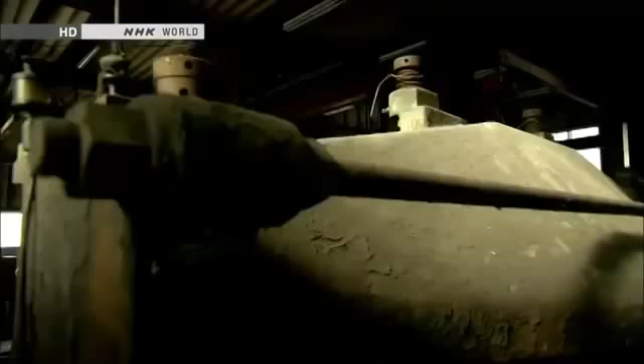In a workshop near Mount Fuji, a curious being has appeared. It's 3.8 meters tall and weighs 4 tons. It is a giant humanoid robot named Kuratas.

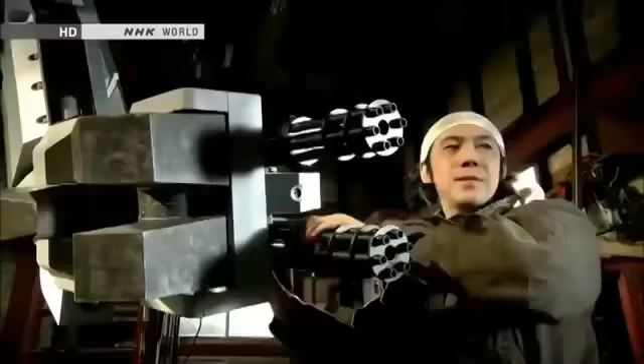Kuratas is a contemporary artist's creation. He holed up here for 2 years, building the robot with input from an expert.

He calls Kuratas a work of art, but it's a sophisticated piece of machinery. A person seated inside can control the robot, move its limbs, and grab things.

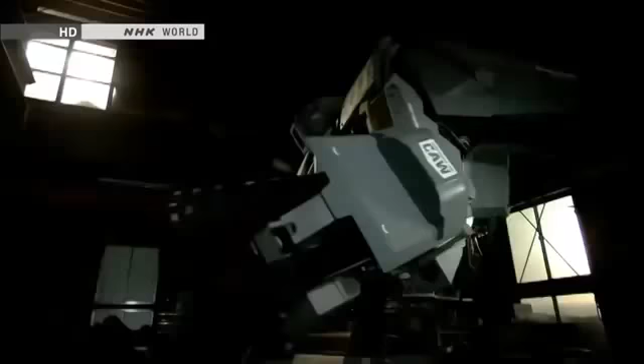The artist says he was inspired by robots in science fiction tales and animation. That vision sustained him as he worked in solitude.

Things that were once unthinkable are becoming real. How will robots evolve? Well, military applications could be one option. They'll probably become more and more like humans. They could surpass us in strength and ability.

People long dreamed of creating these extreme machines. Now, humanoid robots are here.

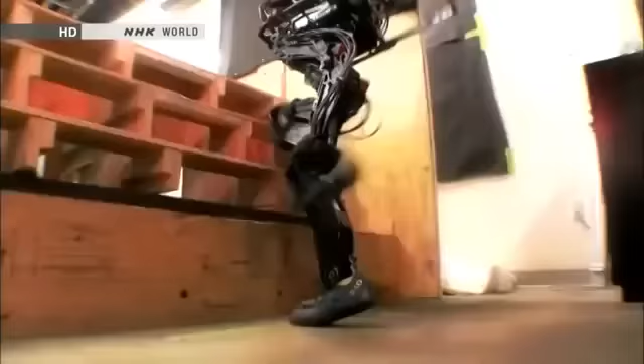They think like we do, move like we do, and even sacrifice themselves for us. We want our robot to change society, because robots must be useful.

Electronics and computing, progress in vision systems, there's many pieces of it. We will see much more capability continue to grow.

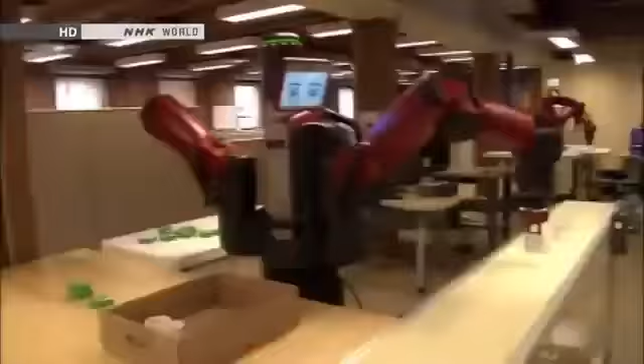Since the Industrial Revolution, people have entrusted some jobs to machines. But there may come a day when humanoid robots do much more complex jobs. Then, what will people do?

And you'll see more and more robots doing things in society, whether it's manufacturing or service applications or home healthcare applications. The key will be to skillfully divide labor between humans and humanoid robots.

The disaster that hit Japan in March 2011 accelerated efforts to develop robots with human traits. The Fukushima nuclear accident left people powerless.

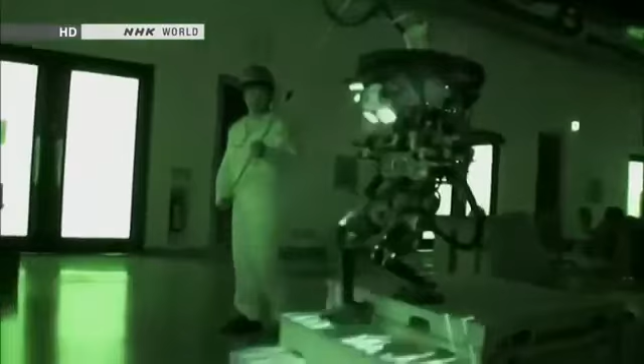Robots can take over when things become dangerous. They can plow through rubble, climb ladders, even make repairs. People are turning to humanoid robots to handle all of these tasks.

We're eager to launch it soon to end the crisis. By joining forces, we can make a truly useful contribution.

Only a humanoid could do it. Or the day will come when robots will really assist mankind. The nuclear disaster in Japan sparked explosive advances in humanoids at the front line of robotics development.

This program explores the future that's fast approaching.

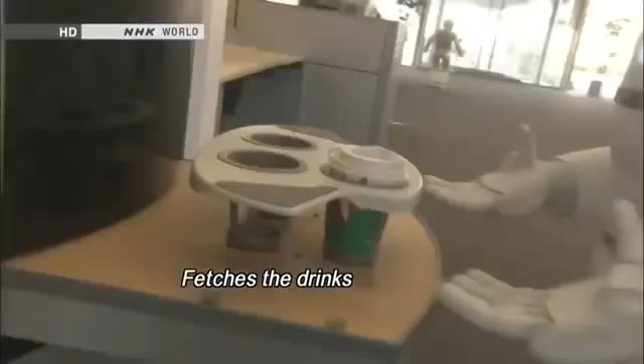Asimo was created by Honda's research and development subsidiary.

We were allowed to film their top-secret robotics laboratory.

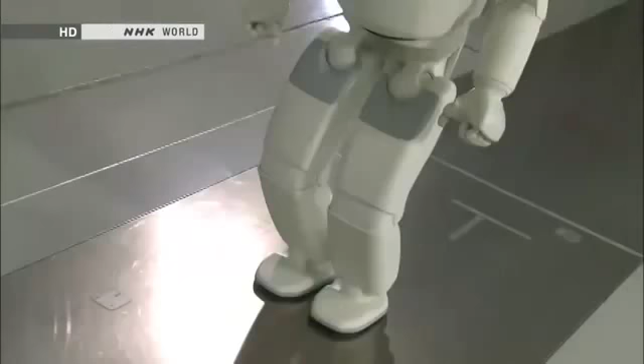Japan is a worldwide leader in the development of humanoid robots. Asimo is the country's crowning achievement. Engineers continue to make improvements.

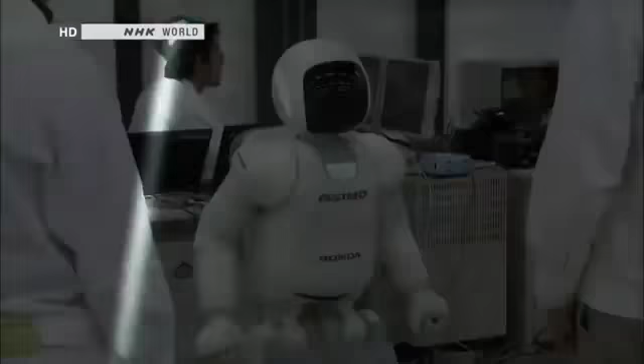Asimo's most innovative feature is its advanced intelligence. The robot can think and act on its own without human intervention. That's made possible by sensors that replicate our 5 senses.

Asimo's head contains 8 microphones. It uses them to listen and engage in conversation.

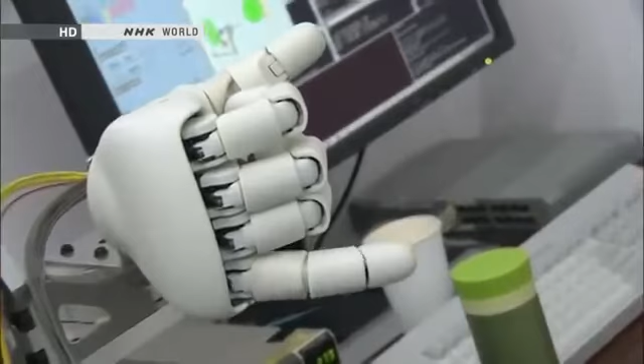Asimo also has a sophisticated sense of touch. Its fingers can make subtle movements, like a person's.

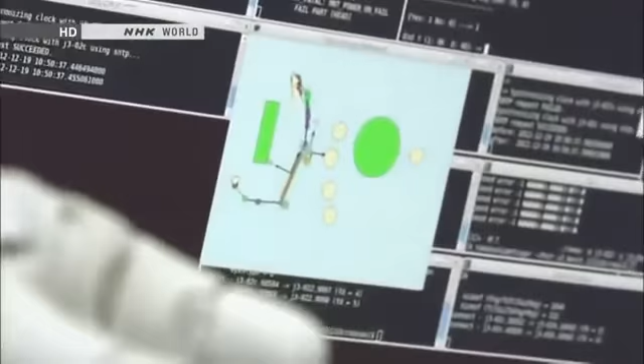Sensors are embedded in the fingertips, too. They can gauge the hardness of an object, like human fingers do.

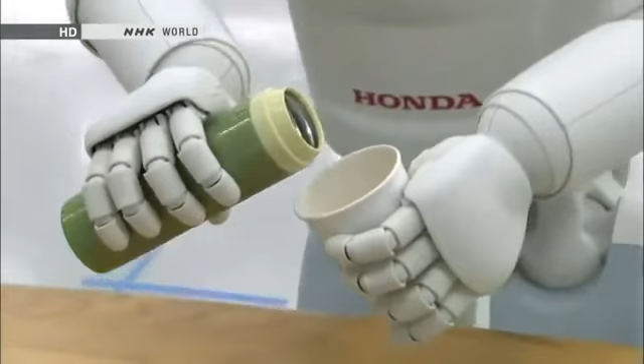Most robots use a fixed amount of strength to grab things. But Asimo exerts more power to open a tightly sealed water bottle and less when holding a paper cup. Its artificial intelligence uses information from the fingertip sensors to adjust the grip.

The developer's ultimate goal is for Asimo to be a valuable partner that coexists with humans.

The engineers who created Asimo all grew up watching animated shows about robots, such as Astro Boy, Doraemon, and Gundam. They dreamed of someday making their own.

Satoshi Shigemi is the development team's leader. He has been designing robots for the past 16 years.

From the beginning, we wanted to design a robot that could help people. To realize that dream, we're constantly asking ourselves, what kind of robot would be able to change society, make people happy, and make life easier for people around the world?

Our idea is to create a robot that will change how people live. We're working through the technological issues, one by one, in order to reach that goal.

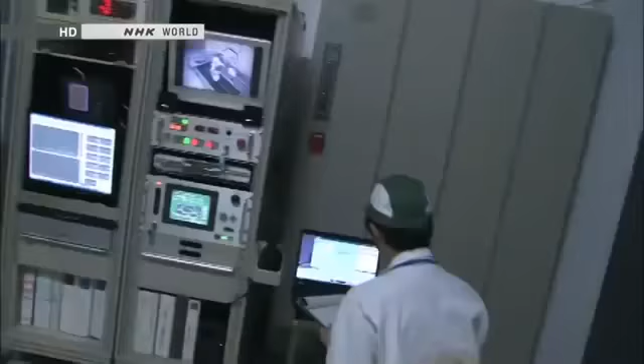Asimo's advanced physical capabilities are revolutionary. The robot can walk and run. It can reach speeds of up to 9 kilometers an hour.

For robots, walking is much easier than running. When running, both feet momentarily leave the ground. Balancing in mid-air is no easy task.

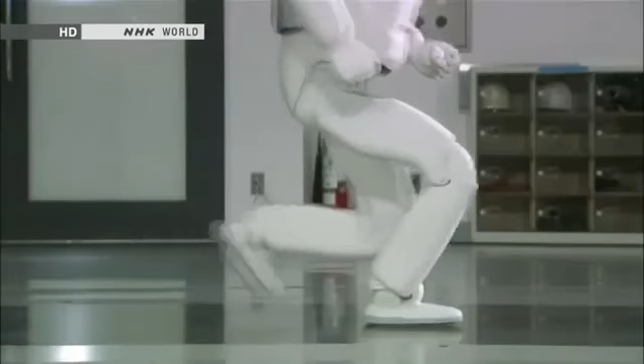Maintaining posture while jumping or floating in the air was a major technological breakthrough. Asimo leans its upper body slightly forward to maintain overall balance, going forward straight in the air. Sensors in Asimo's waist measure the robot's angle, and it leans slightly to compensate, forward or back, side to side. That's how it stays perfectly balanced in the air.

Asimo has been evolving ever since development began in 1986, much like a growing child. But something happened that made researchers realize Asimo's real-world limitations.

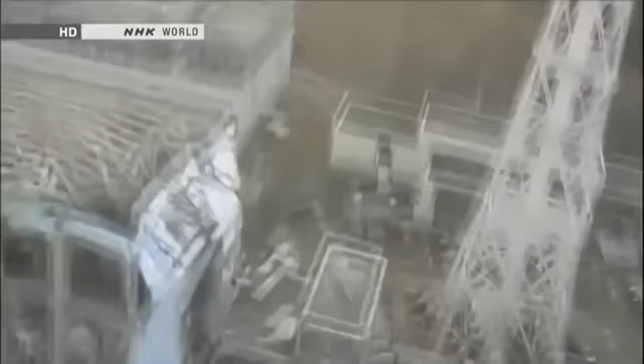It was the accident at Tokyo Electric Power Company's Fukushima Daiichi nuclear plant. The damaged reactors released radioactive substances, making it difficult for humans to deal with the crisis. People needed something that could confront the dangers and bring the plant under control. Robots.

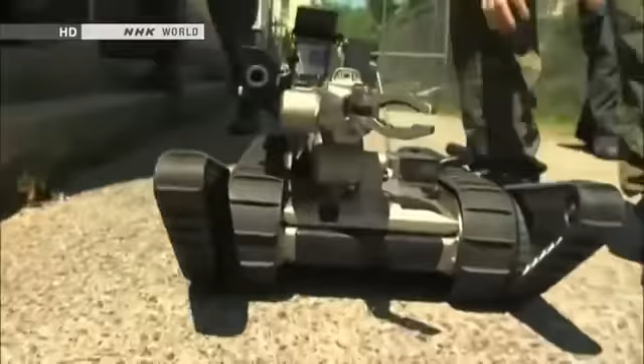Japanese officials sent a request for robots developed by the U.S. military. The robots were sent to Fukushima in April 2011. They recorded images inside the damaged reactors.

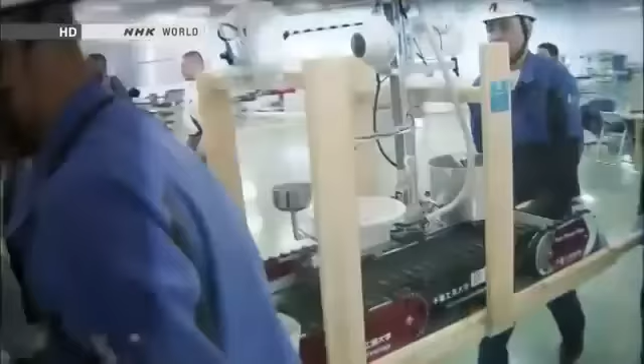Since then, a variety of Japanese robots have been enlisted as well. Robots have proven to be useful, but 2 years after the accident, they're only used for inspections. They're not able to do all the work of humans.

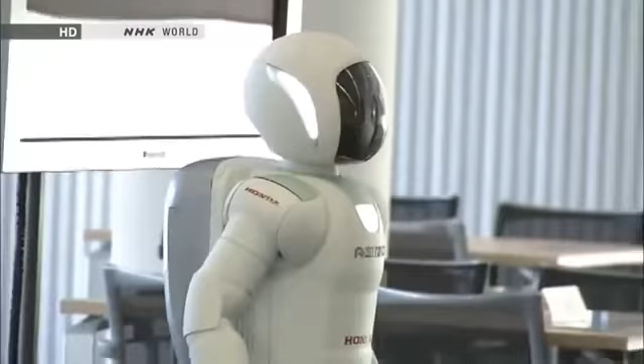What about Asimo? Right after the disaster, people flooded Honda with phone calls and emails asking the company to send Asimo to the Fukushima plant. But Asimo wasn't up to the task.

It could move nimbly over an office floor and other flat surfaces, but large vertical gaps and obstacles were a different story.

We heard from many customers. We ourselves regretted that Asimo couldn't be of help. It was obvious that the Asimo we had built wasn't ready for real-life action. We realized right away that we needed to make something different, something new that could offer immediate assistance.

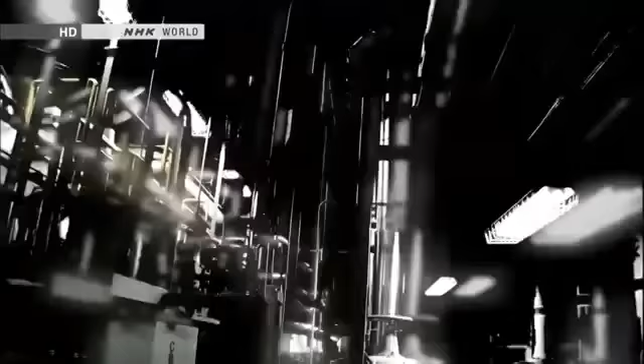Honda wasted no time. Company officials offered to create a robot free of charge to assist TEPCO in the recovery. TEPCO accepted. Officials asked for a robot that could open or close valves inside the nuclear plant.

We wanted to flush out radioactive materials that remained inside the pipes and bring down radiation levels in the facility. That was our first goal. Unless we opened or closed the valves, the area would remain highly radioactive, and that would prevent workers from entering the facility and impact the entire decommissioning schedule.

How many valves are there? Each unit has from several thousand to tens of thousands of them.

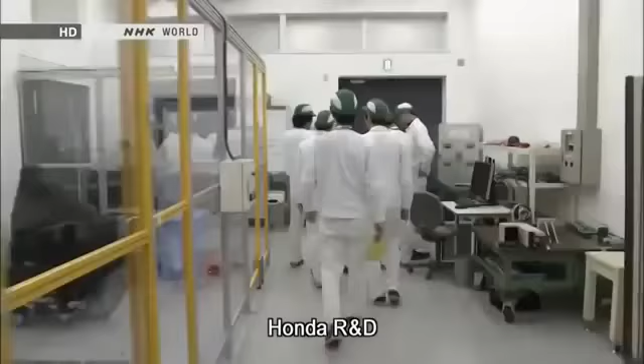In July 2011, 4 months after the accident, Honda began designing a robot for use at the nuclear plant. Members of the Asimo team were put in charge of the project. A humanoid robot would take too long to build, so engineers focused on making a robot specifically for operating valves.

Asimo was crucial to their efforts. Its ankles employ advanced balancing technology. Developers reasoned that using it would allow the new robot to work inside rubble-filled reactor buildings.

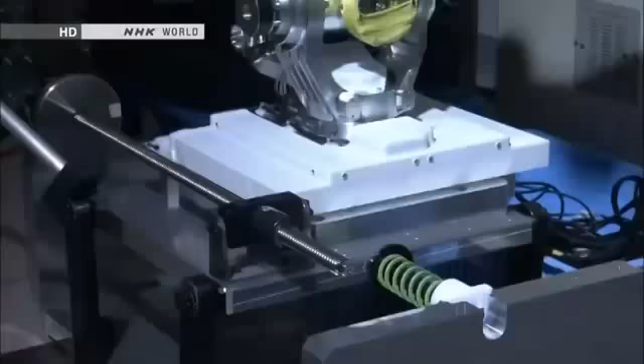The team worked exceptionally fast, completing a prototype in just 4 months. They turned Asimo's leg into an arm for operating the valves. Even when the base moves, the arm remains steady.

So far, so good. Officials from TEPCO evaluated the prototype at the National Institute of Advanced Industrial Science and Technology. The government-backed group for cutting-edge research contributed to the development effort.

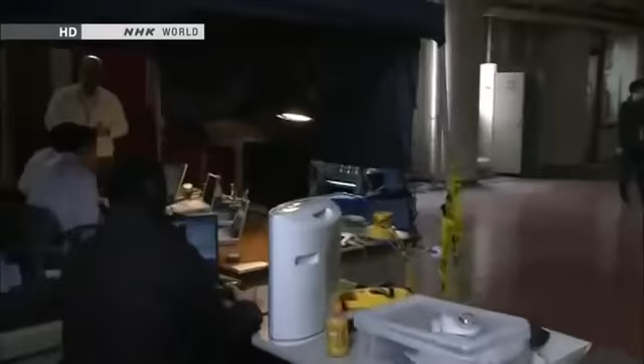A TEPCO official couldn't take his eyes off the robot's movements. We may be quite demanding, that's okay. We might be quite direct. The test is designed to replicate conditions inside the nuclear plant.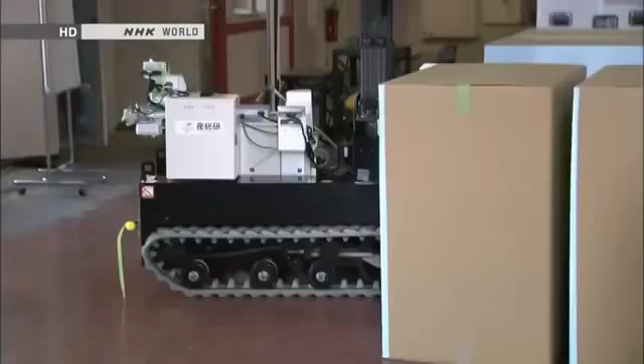The robotic arm is remote controlled. Testers send the arm toward one of the valves. There are a number of unknowns, including the condition of the valves. They may have rusted since the accident. A valve might break if the robot applies too much force, or it might not budge at all.

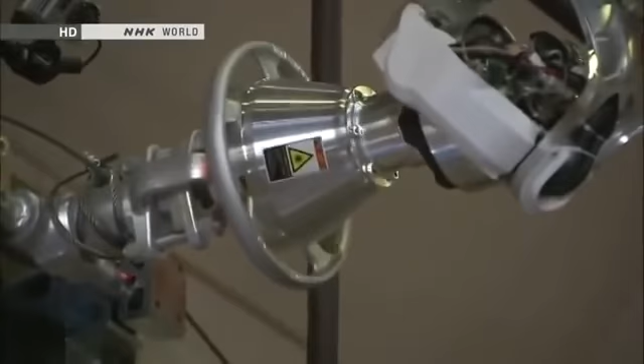The robot uses just the right amount of force and turns the valve on the first try. It's passed the test. This robot can do more than inspections. It could help in the recovery effort.

From what we've seen, the robot seems near perfect. We want to use it as soon as the need arises. It's important that we quickly do what we can to make that possible.

The Fukushima accident also encouraged U.S. developers to design emergency response robots. Department of Defense officials have spearheaded the effort. Before, they had shown little interest in humanoid robots. Now, they view them as vital for disaster response. The architect of the new strategy is Gil Pratt of DARPA. He oversees funding for leading-edge research at the Department of Defense.

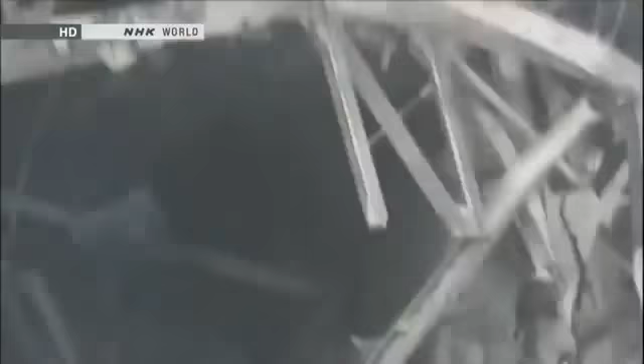There are many aspects of disaster response in Fukushima that inspire people in robotics to work on new capabilities. If they were able to take action during those first 24 hours, then the first reactor maybe would not have blown up in an environment that is too dangerous for a person to do. And what's important to us is that the robot is compatible with human environments, compatible with human tools.

And also compatible with human operators without special training. As a result of that, the easiest form that comes to mind is the human form. DARPA is backing the development of a humanoid robot for catastrophes, such as nuclear power plant accidents.

This company is leading the development work. It has already built several military robots. Okay, I'll show you the current status of the robot.

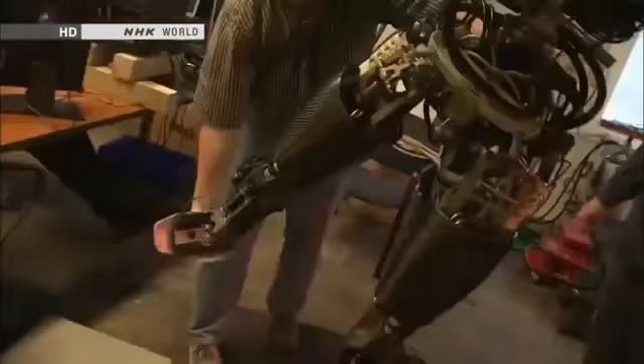This is the first American-made humanoid robot for disaster response. It's called Atlas. Before, U.S. designers had focused on robots with specialized functions.

Why the sudden interest in humanoid robots? Traveling over debris, prying open valves, using tools for repairs. Performing multiple tasks like these is impossible for specialized robots. Crises also require robots that can navigate doors and stairs. Humanoid robots are ideally suited for such situations.

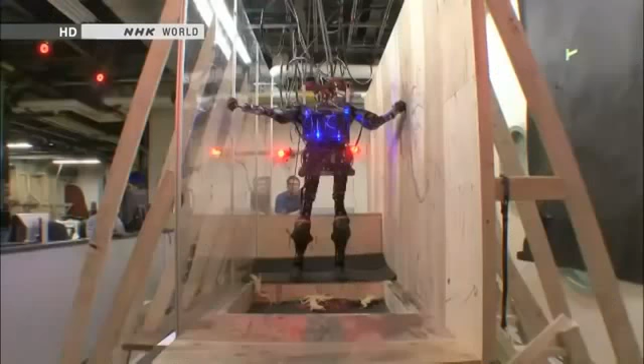Tests of this prototype were going smoothly. It can easily climb stairs and jump from a height of nearly 1 meter. It can negotiate obstacles using its arms and legs. It can already handle more demanding environments than Asimo can.

Atlas is loaded with technologies originally designed for military robots. A quadruped robot called Cheetah can race through a battlefield at 50 kilometers an hour. LS-3 is for transport. It can carry heavy supplies for soldiers.

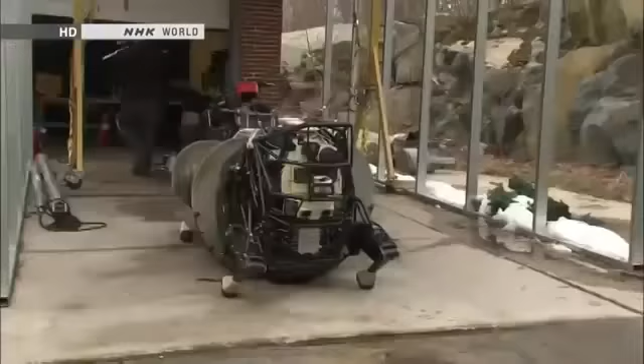The ferocious-looking robot gets its strength from a powerful hydraulic drive system. A hydraulic device can be small, yet quite strong. The black cables convey hydraulic power to the legs. That generates the brute force required for harsh conditions on the battlefield.

A web of hydraulic cables covers Atlas's body. They form a muscular suit of armor for clearing debris.

Another important technology comes from military robot engineering. This machine's joints have a wide range of motion. They allow for flexibility that humans can't achieve. Atlas's joints are capable of moving in 28 different ways. Atlas can crawl through narrow spaces and withstand sudden shocks.

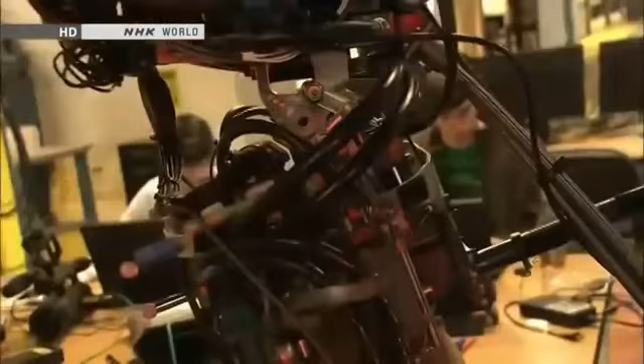Then we have the knee. This has 3 in the hip, just like us. This way, and then this way. I am very impressed with the number of degrees of freedom. It will be able to do these human-compatible tasks without a lot of the limitations that other robots have.

Engineers will combine Atlas's rugged body with sophisticated artificial intelligence that's almost near completion. They aim to complete the robot by December of next year.

One reason you see humanoid robots is because there are some people working who are really interested in robots as an entertainment thing or as a performance thing. I think that's different. We're much more interested in basic capabilities for emergency response, rescue. So I don't think Asimo has been designed to do those things yet.

U.S. engineers stepped up their efforts to develop humanoid robots after the nuclear accident in Japan. Japanese researchers are embracing the same mission. In November 2012, robot engineers from around the world gathered in Osaka for an international conference on humanoids.

Gill Pratt from DARPA was one of the participants. He came to invite engineers to join a project sponsored by the U.S. Defense Department. Okay, March 11th.

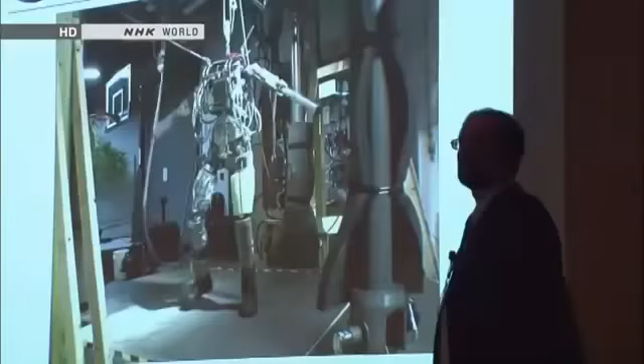They have 2 degrees of freedom, not 1. The Robotics Challenge is a competition to develop emergency response robots for major disasters like Japan's.

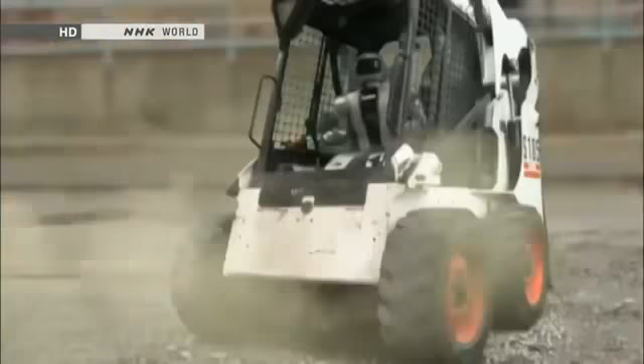The challenge consists of 8 tasks. Driving a vehicle to approach a disaster site. Walking over rubble. Removing obstacles. Opening doors. Using tools to break down walls. Climbing ladders. Turning valves. And making repairs.

A single robot must complete all 8 tasks. The development period is 2 years. DARPA will provide contestants with funding of up to $4 million.

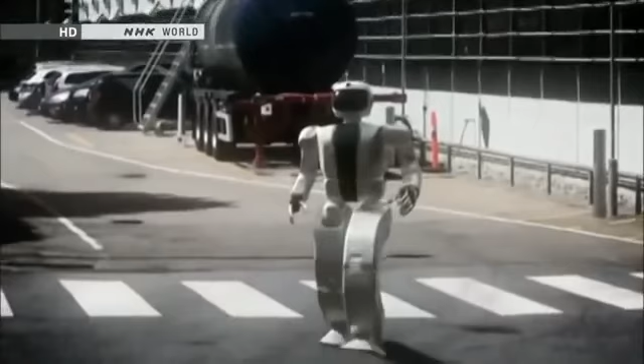DARPA has received over 100 proposals from research groups worldwide. They include renowned organizations like NASA and MIT.

Japan is at the forefront of humanoid robotics engineering, yet its researchers hesitated to throw their hats into the ring.

So actually, to me, it's difficult not to see that some of the results of the DRC are going to be used to advance, as you say, advanced military technology. The DRC is about developing robots that I believe wholeheartedly are completely impractical for military purposes, for offensive military purposes.

Will the technology that we come up with find its way into military systems? Probably yes. But I guarantee you that if you work on a robot for healthcare, there's a chance that that technology will also find its way into military systems.

The members of one Japanese research institution wanted to take part in the competition.

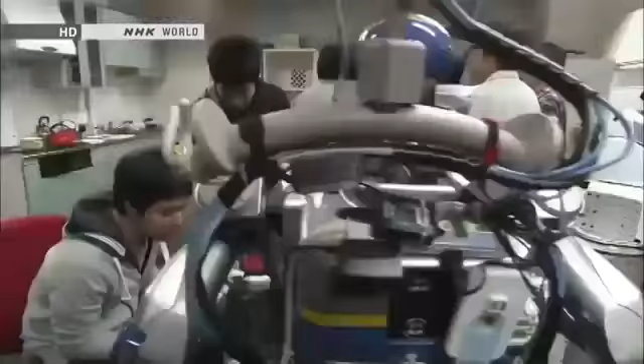They worked at the University of Tokyo's robotics lab. Researchers there, along with those at Honda, are global leaders in robotics engineering. But they faced a major obstacle to competing: the university bans military-funded research.

Three researchers made a decision. They told the university they were leaving, then decided to set up a venture company and enter the DARPA Robotics Challenge. They couldn't shake the feeling that they should leave their quiet university lab and help resolve the nuclear crisis.

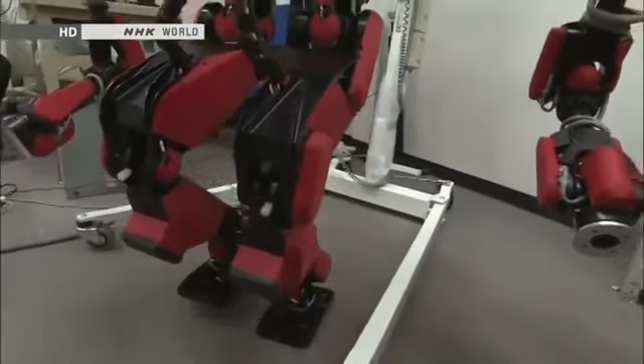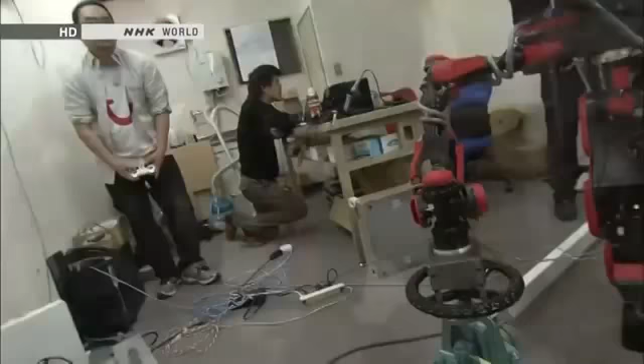Six months after launching their venture, the team had just completed a prototype with help from university graduates. Its long arms can exert 10 times more force than those of conventional humanoid robots. It can easily turn a valve that's too tight for a person to turn with one hand. The strong force comes from a large electric current that pushes the motors to their maximum limits.

A reddish fluid circulates through the robot's body. The fluid serves as a coolant that keeps the motors from overheating. The cooling system should enable the robot to perform hours of grueling work at disaster sites.

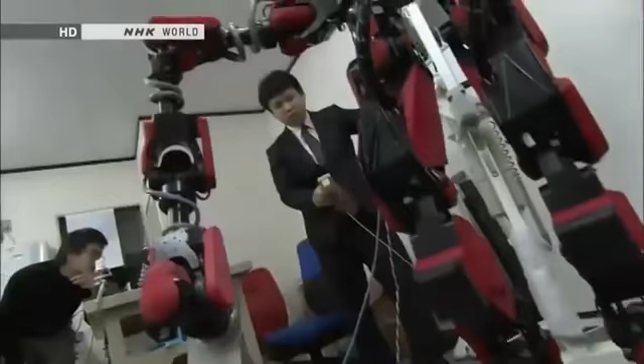The time has now come for the developers to apply their years of research to the real world. A nuclear crisis has happened here in Japan. Radiation is escaping. Researchers in every field must wonder at least once if the technology they've been working on could help resolve the crisis. By joining forces, we can make a truly useful contribution. It's with this in mind that we decided to enter the competition.

One country is quickly catching up with Japan in humanoid robotics: South Korea. KAIST is a government-funded lab for the advancement of science and technology. Researchers there were among the first to express interest in DARPA's Robotics Challenge.

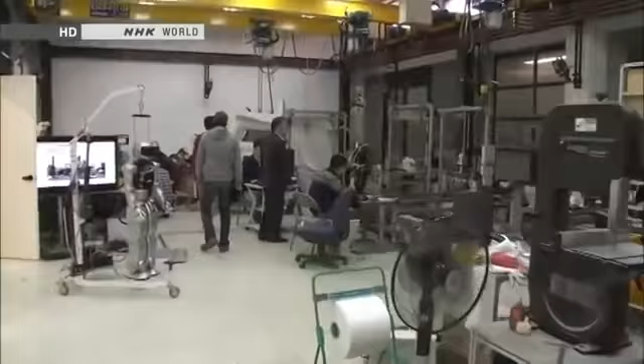This humanoid robot is called Hubo. It's modeled on Asimo, which Honda spent 14 years developing, but Hubo was built in just 5 years. Hubo deftly manipulates its hands, and it's also good at dancing. Its moves look just like Asimo's.

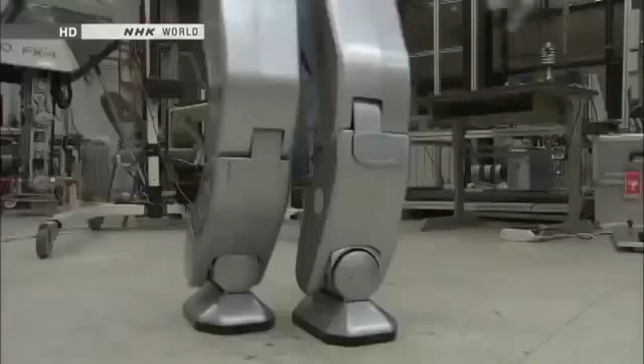Hubo has been undergoing a major upgrade ahead of the competition. It can now bend backward at the waist while walking to handle all kinds of environments, and it can quickly pick up tools. The tests were going well.

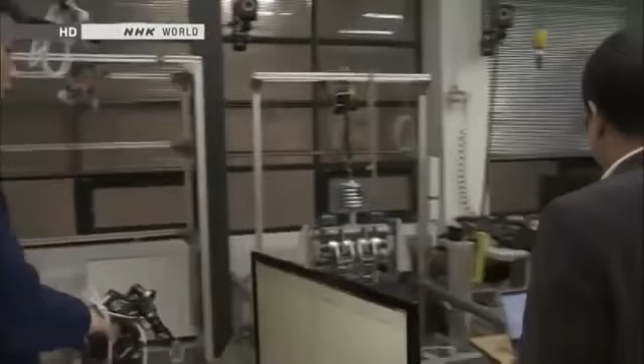People have always compared Hubo to Asimo. Engineers now had a strategy to get ahead of the Japanese developers. They decided to publish certain details about Hubo's design and pursue joint development with researchers at other institutions. One could say that this space inside Hubo's chest captures the heart of their thinking.

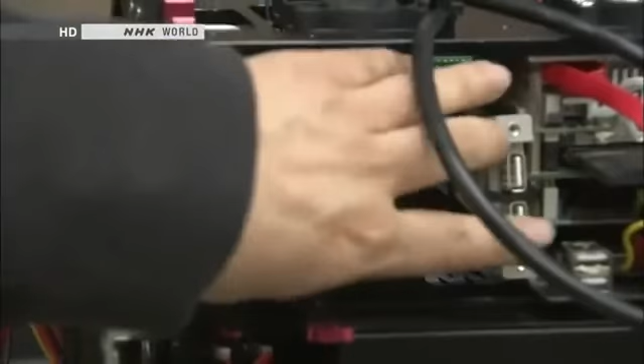It's empty now, but this is where artificial intelligence will be installed. It's removable. Hubo does not yet possess artificial intelligence. Its motions are as sophisticated as Asimo's, but Hubo's movements are all pre-programmed.

U.S. universities that lead research into artificial intelligence will develop a brain for Hubo. The stage has been set for a joint U.S.-South Korean team to compete in the DARPA Robotics Challenge.

Sharing is the key to making technological advancements. That's true in South Korea and in other places too. Research shouldn't be confined to one place. People developing humanoid robots elsewhere are too close-minded.

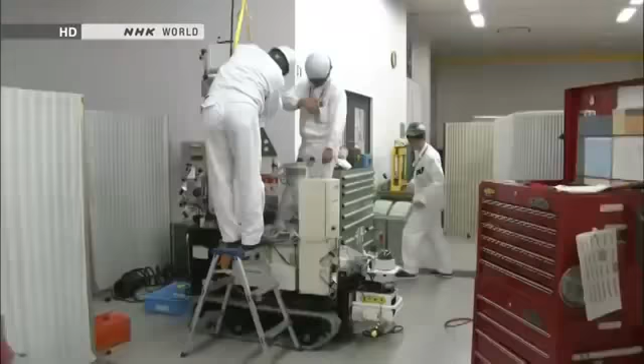Researchers at Honda were also invited to enter DARPA's competition, but they declined. Their energies were focused on designing a robot to tackle Japan's nuclear crisis.

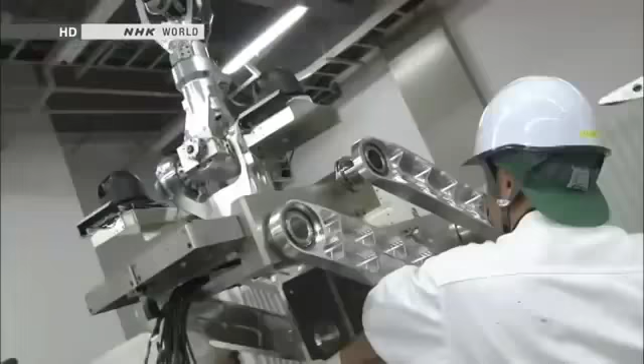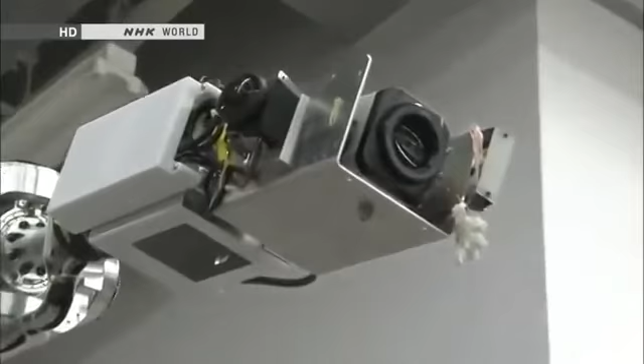Nearly a year has passed since Honda's robotic arm passed evaluation tests, but the device has yet to be deployed to the nuclear disaster site. That's because officials at TEPCO requested a change in specifications. Engineers have replaced the valve-turning hand at the end of the arm with a camera.

TEPCO had changed its plan. Officials decided to put priority on assessing conditions inside the plant's facilities. They said it was too early to have robots work on valves. There wasn't even a recovery plan in place when we were working out the valve manipulation tasks.

Confusion also prevailed at the site. We were expecting valve work to begin 2 to 3 years after the disaster, but the timing has ended up being later than what we'd assumed, 1 month into the crisis.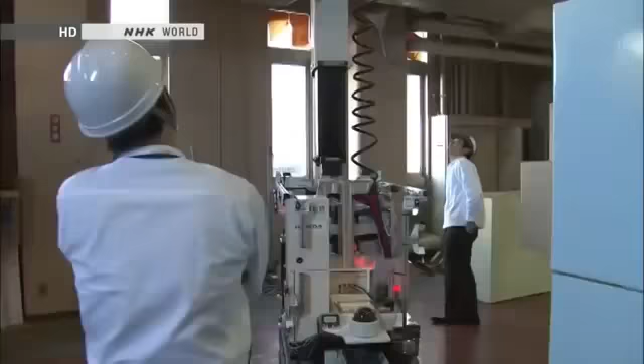The robotic arm will soon be sent to the accident site. It will provide the first images filmed from high up. The robotic arm was not the end of Honda's efforts; its engineers had another secret mission.

They would develop a new humanoid robot, an updated version of Asimo for use in disasters. The site where the Fukushima disaster took place is dark and off-limits to humans. Only a humanoid robot with both intelligence and motor skills could climb over the debris, get to the accident site, and perform the work of people. In other words, a robot like Asimo.

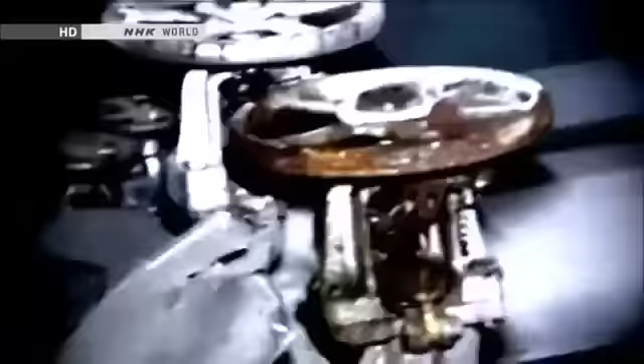Let's use our skills to make a humanoid robot that can tackle disasters. Asimo's engineers were united by this idea. The robot they envisioned would not only walk, but also use its arms to crawl, using every means possible to reach its destination. A dramatic update would be necessary.

A disaster reduction robot would be useless if it couldn't get to the site. It's important to get to the scene no matter what. Disasters create all kinds of debris that crumbles easily or breaks when stepped on. It's because it's dangerous that robots replace humans. That's what makes them valuable. A robot that couldn't get to the scene would be totally useless.

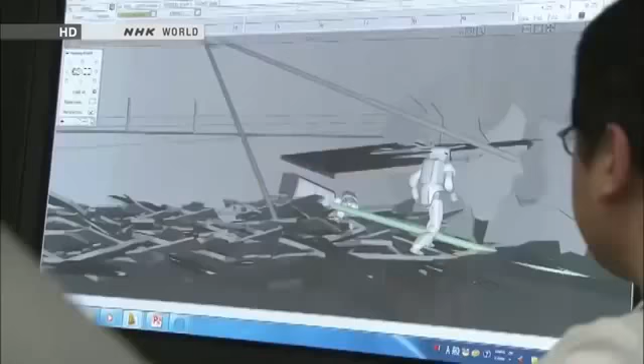Honda's engineers began developing robots in 1986 with the goal of making people happy. 27 years of research is now being put to the test. As we saw in the Fukushima Daiichi crisis, the bottom line is that robots can stand in for humans in places we can't go to or that are too dangerous. I am committed to delivering what's needed, when needed, in the shortest amount of time.

The accident in Fukushima spurred the development of humanoid robots around the world. The disaster also prompted people to question the roles of humans.

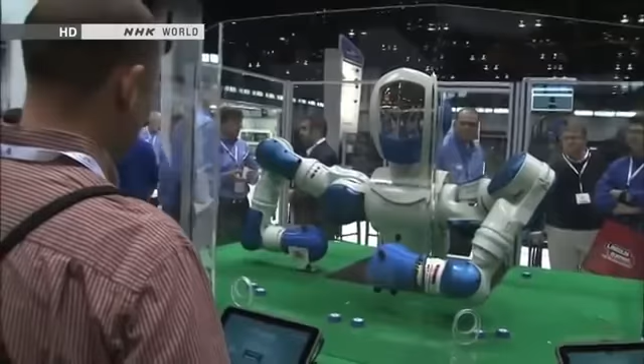One of the largest trade fairs featuring industrial robots took place in January. Global manufacturers displayed their latest models. Companies are developing more and more two-armed humanoids for industrial use.

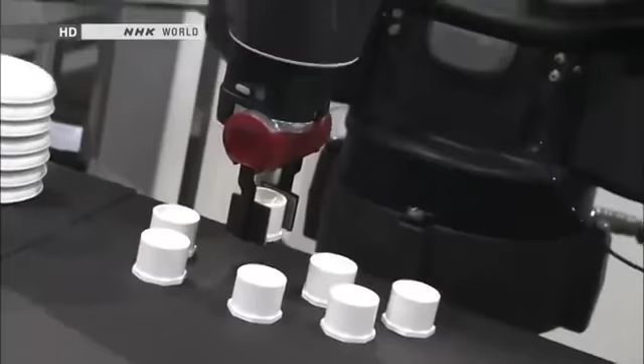One new product at the event caught a lot of people's attention. Baxter was created by the inventor of a best-selling cleaning robot. It's equipped with sophisticated artificial intelligence, designed to work side by side with people in factories and other settings.

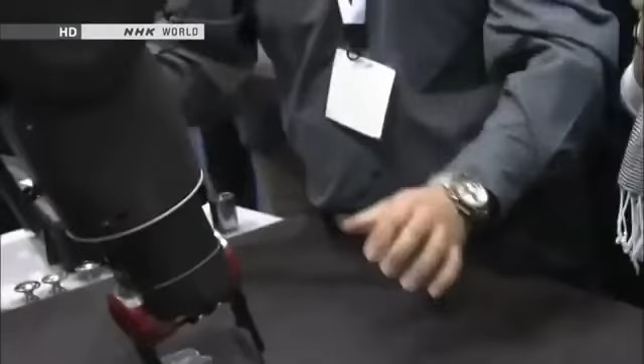The robot's most unusual feature is its ability to master a task in a matter of 5 minutes. All that's required is step-by-step manual instruction. No complicated programming is needed.

Let's pick up this part. So you bring the arm to the part. Yep, just like that. So we have the part, close the grasp. Yep. Grab the arm and bring it to the table.

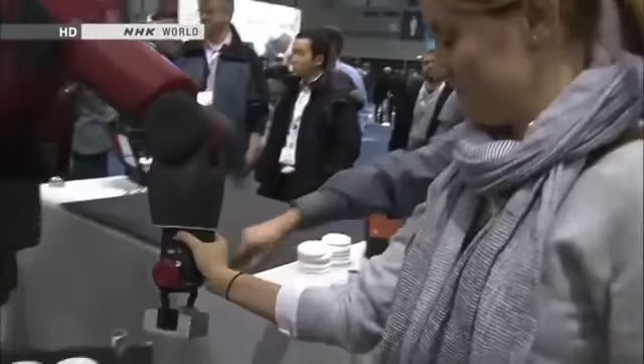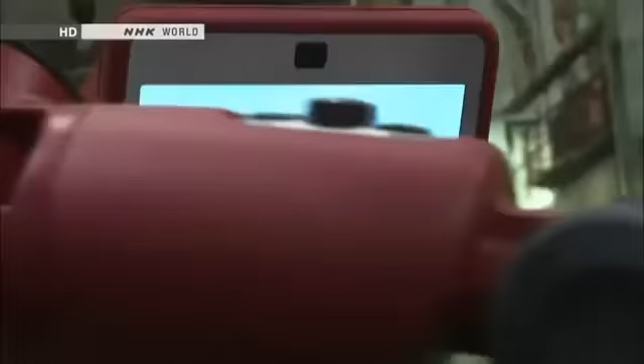The expression on the face on the LCD screen shows whether or not the robot has understood the task.

Baxter costs $22,000, a bargain for a humanoid robot. The maker says buyers can recoup their investment in several months and slash labor costs.

I'm very impressed with it. I work for a small manufacturing company, and we have some older employees who are looking to retire. There's some tasks that Baxter could do for us very effectively, plus it would be cheaper than employing a person. It's not going to get tired, it's not going to need to stop, it'll keep running while everybody else is taking their lunch.

The Boston-based manufacturer has a flood of back orders.

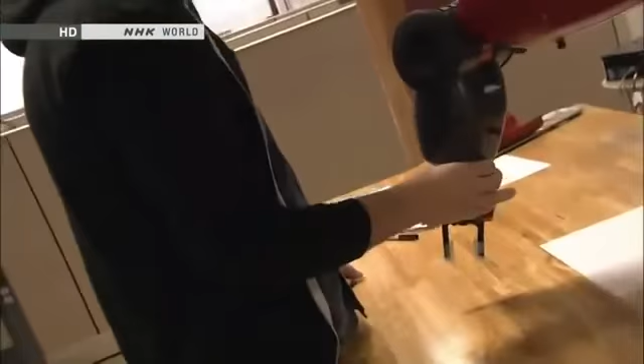Officials say someday Baxter will work at places like coffee shops, taking orders and grilling burgers. Eventually, they expect to have 500,000 U.S. customers.

Today we're focused on manufacturing, and there's a very big opportunity in manufacturing. But there's lots of other places that a robot like Baxter could go. We had the Industrial Revolution at the turn of the last century. We've just gone through the computer revolution, effectively at the turn of the most recent end of the century. We are now into the robot revolution.

Will people and robots someday compete for jobs?

At 8:30 one morning, a group of new employees takes part in daily morning exercises. They are 13 humanoid workers called NEXTAGE. This company began using the robots in earnest last year.

They have 2 eyes and are just like humans. They're cute!

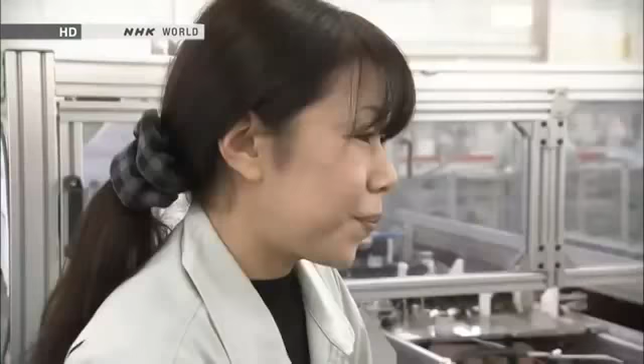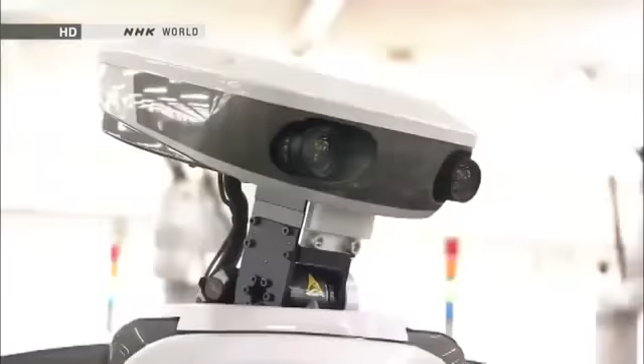This factory manufactures money sorting machines for cash registers. The humanoids work on a production line that was previously manned entirely by humans. The robot visually confirms the parts set in place by a human worker, then it begins its task.